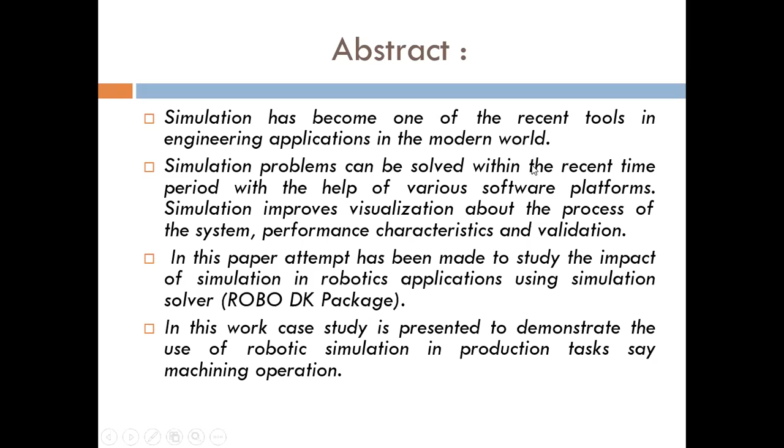In this case study, production tasks like machining and welding are some of the examples taken to simulate these various activities with the help of the RoboDK package. And based on that, identifying the challenges that are addressed inside the work cell with the help of the simulation assistant programming language.

Next one is the introduction about robotic simulation, the current recent practices. Due to modern industrial advancement, simulation has been acknowledged as a key important tool, not only in academic institutions but also in industrial sectors. So this has become the focused attraction from today's public point of view.

Through simulation, we are able to design a 3D model, and also we can plan, analyze, and take a proper decision to measure the remedial steps to improve the system efficiency. So in this work, a virtual robot is designed and the arm positioning is planned in such a way that the arm must be free from all obstacles when the activity or any work is going on inside the work cell system.

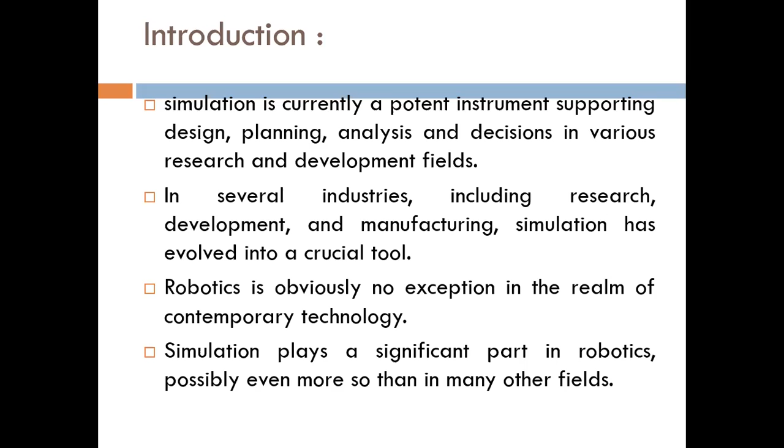So further research and development studies are conducted to better position the manipulator arm of a robot and the corresponding path axis, in order to smoothly carry out the given assigned task. The simulation process simplifies much and gives a lot of benefit in both the virtual and the physical world.

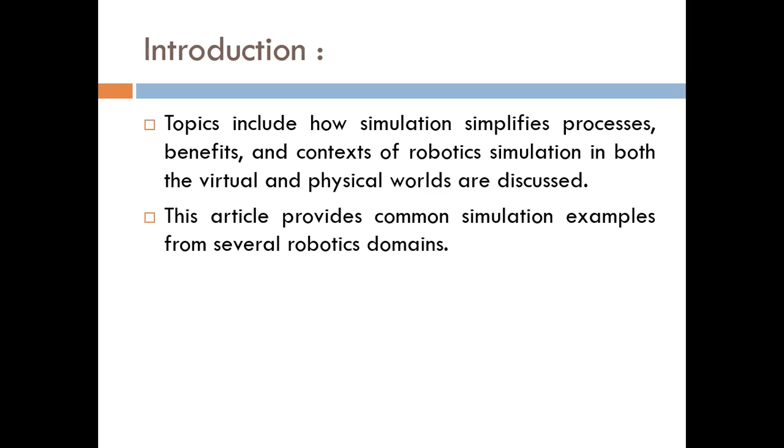So there are two types of application interface in robotic simulation. One is online, another one is the offline programming method. So using any one of these methods, we are able to analyze the kinematic motion of a robot in order to accomplish the task.

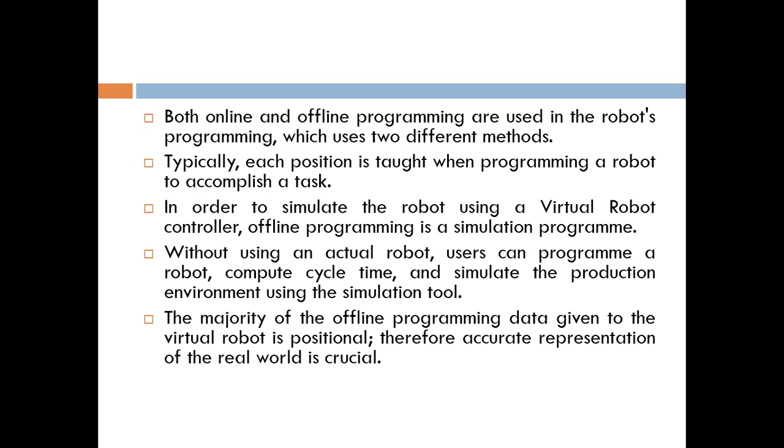The problem objectives are listed out here. Simulate the various manufacturing tasks like machining and welding with the help of the virtual assistant. Analyze the arm kinematics of a robot with respect to the coordinate axis. Determine the collision mapping of a manipulator arm within a given work cell system to avoid accidents.

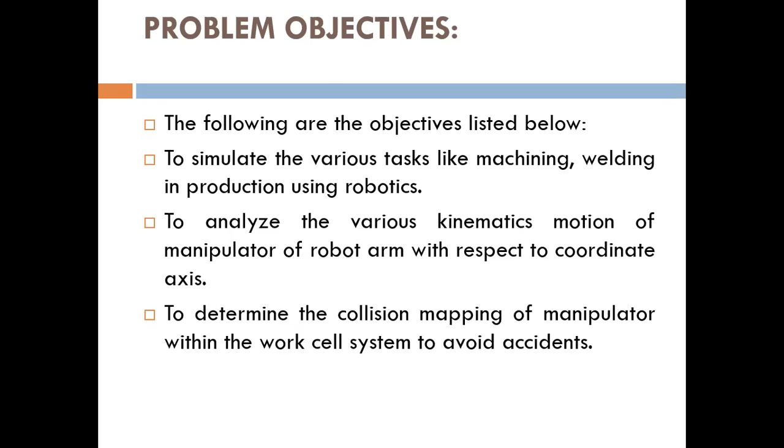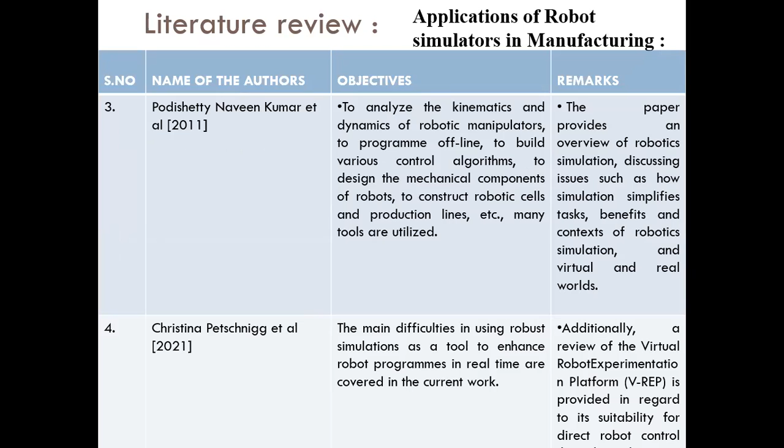These are some of the key literature works done in three broad areas of simulation. First one, in the education industry, how virtual simulators are used to improve the quality and efficiency of classroom teaching. Next application, robot simulator software in factory operations, in manufacturing, and assembly lines. So these are the three broad areas of literature which are collected so far.

So in the above survey, it is clearly evident that the importance of simulation has gathered a lot of attention for researchers to contribute their valuable ideas in three broad areas like the teaching and education field, manufacturing sectors, etc. So among the three broad areas, in my project work I have chosen manufacturing simulation as the primary focus of study with the help of the RoboDK solver.

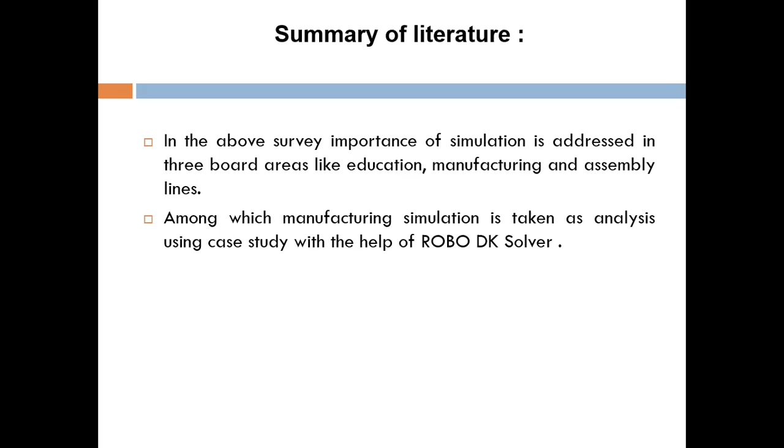And next, in this part of the slide, we are going to see the methodology, how the simulation can be done with the help of the RoboDK solver. So this workbench is considered to be the default workbench of the RoboDK solver package. So how to install a virtual robot in the workbench? Go to the File menu, click File, choose Open.

So click the Open tab and browse the different sources of the robotic machine which you are going to install in the workstation system. Click any one of the virtual robotic assistant 3D models. Click and mount it on the workbench.

And we need to perform the collision mapping in order to check whether the arm manipulator of the robot is free from obstacles or not when the job is about to be carried on within a production shop. So for that, go to Utilities, click Utilities, then select Collision Mapping Planner. So a pop-up dialog box will open like this.

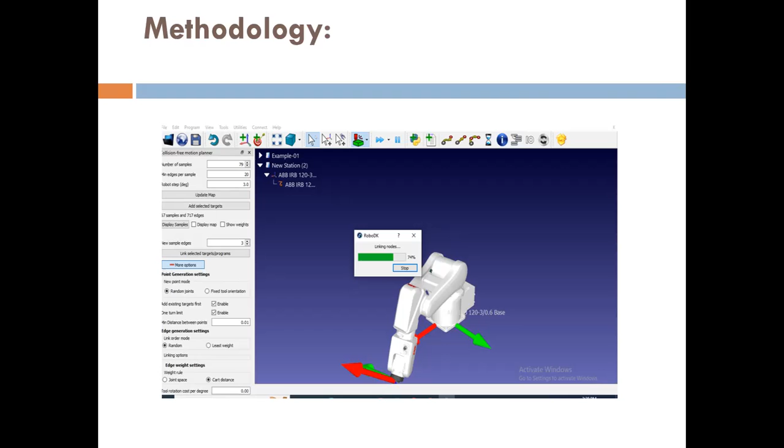Here we are able to run a number of iterations and select the path generation of a robotic arm by following either of two methods, random joint method or fixed tool orientation. Here, random joint: the arm will move randomly in order to sense or detect the obstacle which is kept near the work system, based on which it will modify the position of the arm where there was no obstacle. So that we can prevent a collision or an accident when two machines are working in parallel within a given shop floor system.

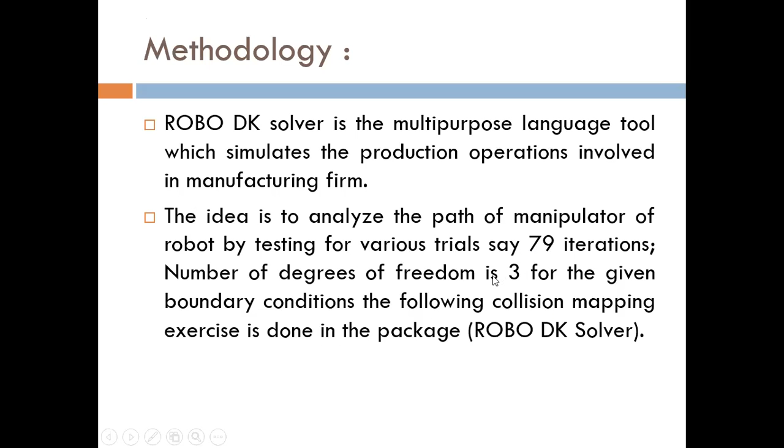So this experiment is run for nearly 79 iterations, and the given degrees of freedom is commonly fixed to be 3. So collision mapping is one of the primary exercises carried out to perform the mechanism of an arm type robot in order to position the path in various orthogonal coordinate systems, say x, y, and z axis respectively.

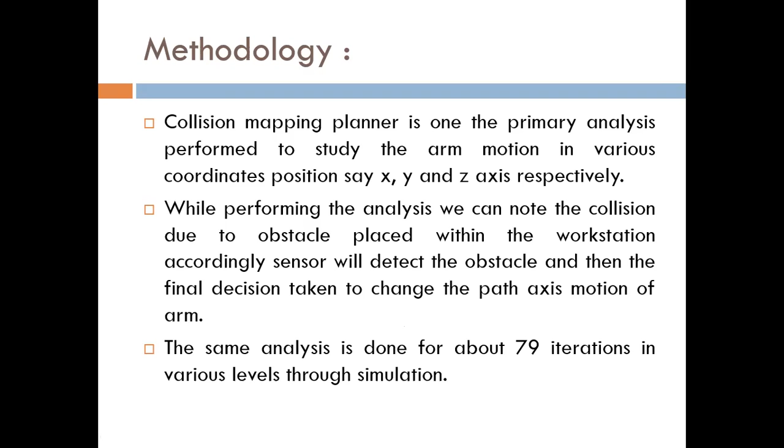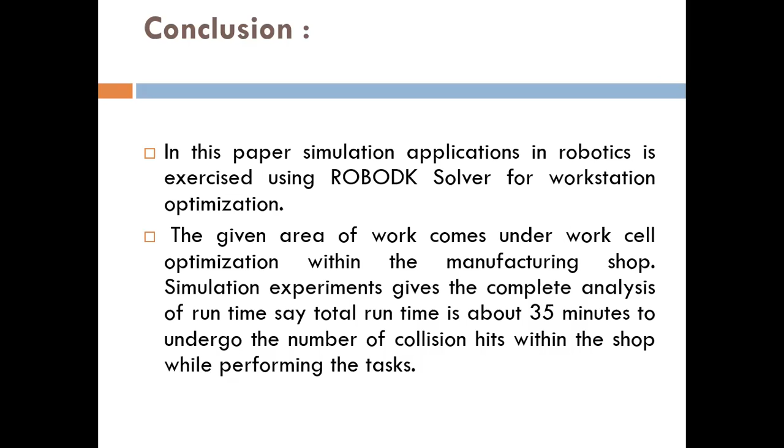While performing the analysis, it is noted that the obstacle placed within the workstation is detected with the help of the virtual sensor, and based on that, it realigns the axis path motion of the arm. So everything we can do and test through simulation mode. And the total runtime of the experiment is 35 minutes to do all these kinds of obstacle detection experiments. The number of collision hits is measured to be 10.

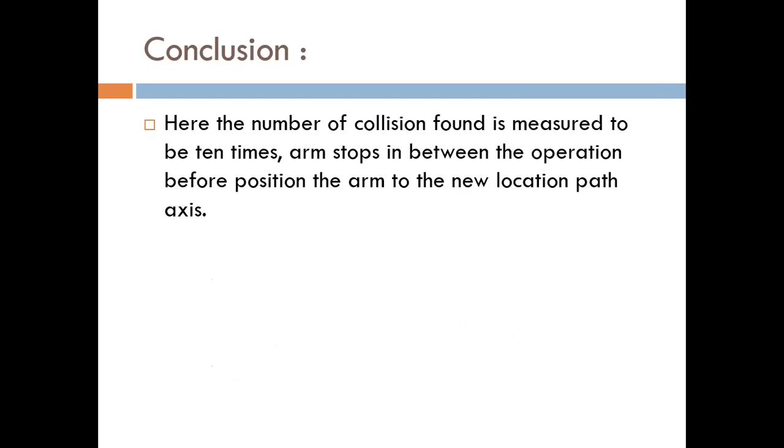So every time a collision is detected, the arm gets stopped and it will find the next new position or path to change the axis of rotation, the arm rotation, in order to do the given task.

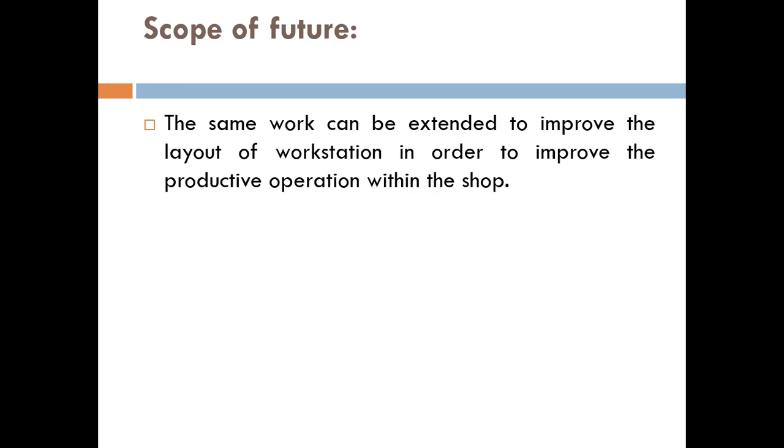The future scope of work: the same domain can be extended in order to improve the facility planning or the plant layout of a given workstation to increase the operational effectiveness of the manufacturing shop by using plant simulation software like Tecnomatix, FlexSim, etc.